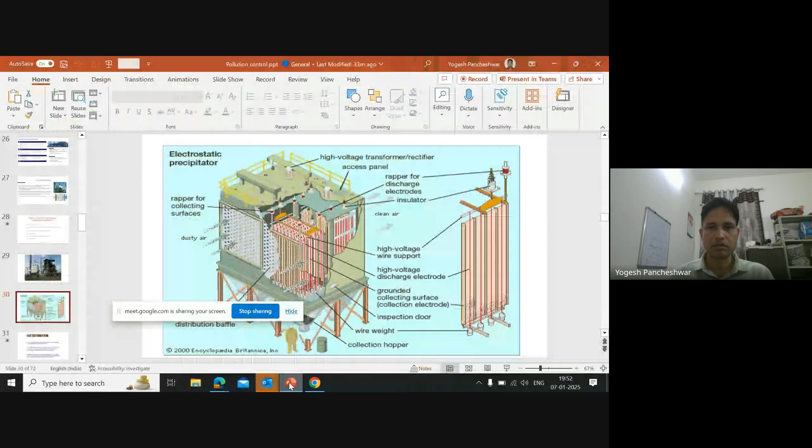Is the presentation visible or something? No. Entire screen share, okay, then I have to select the share. Entire screen, then share, I have to select something. Yes, sir. After that you have to click on the screen that you want to share. Yeah, and after that click on share. Okay just wait, just share your screen, then my screen. Not coming. Share, okay. Is it coming right now? Yes, it is coming sir. Now it is coming. Okay, yes, thanks.

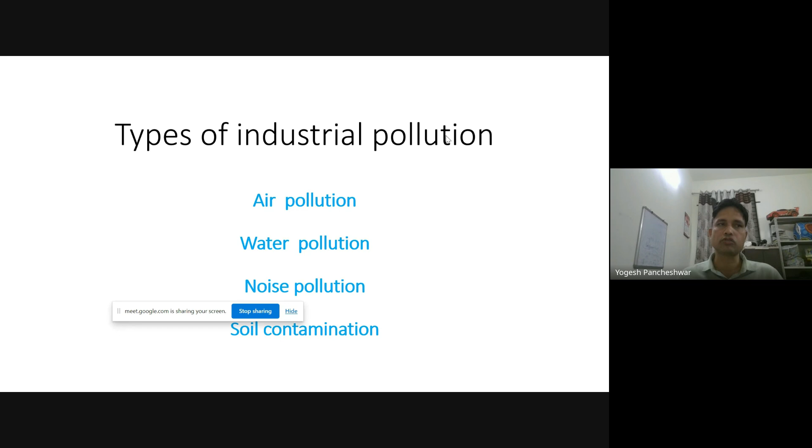As you know, in most industries, the most important thing is safety of the equipment and safety of the human. Before starting any project, we invest so much in how people will remain safe during the whole life cycle of the industry. The second most important thing we focus on before production is the pollution control equipment. This is a legal requirement as well as a requirement for the longevity of the plant.

So industrial air pollution is basically this: the industrial process generates various particulates and harmful gases called pollutants. In industries we generate fly ash, coal dust, iron ore, and harmful gases like SOx, NOx, and volatile organics. We cannot release these to the atmosphere beyond certain limits, and we need to control particulates and harmful gases to the desired level, which varies from country to country.

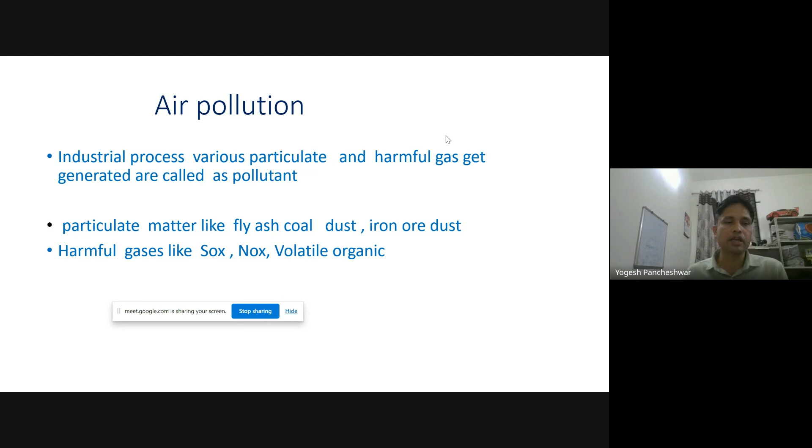As you already know, some industries have already been closed down due to high pollution. For example, the Vedanta Tuticorin plant was closed for almost 5 years for not meeting environment norms. And recently we have also been fined by the Netherlands, we have one plant in Tata Corus also, where we were fined 250 crores for not meeting industrial norms.

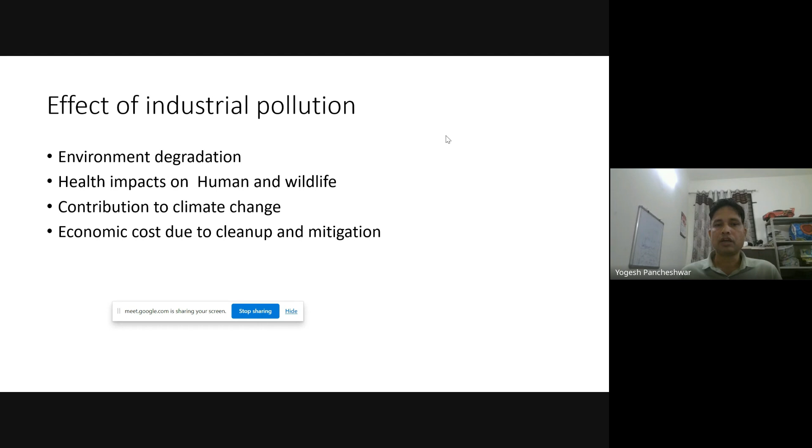Already I have explained what things can happen that affect health, and breathing problems we can face because of that. People who are working in close vicinity with the dust and air pollution, it also affects the plant safety.

If more emissions are there, then it will affect the visibility and some accidents can happen. Besides that, it also reduces the life of the equipment. If the pollution control equipment is not working properly, the life of these equipments will be reduced, and definitely it will also reduce the efficiency.

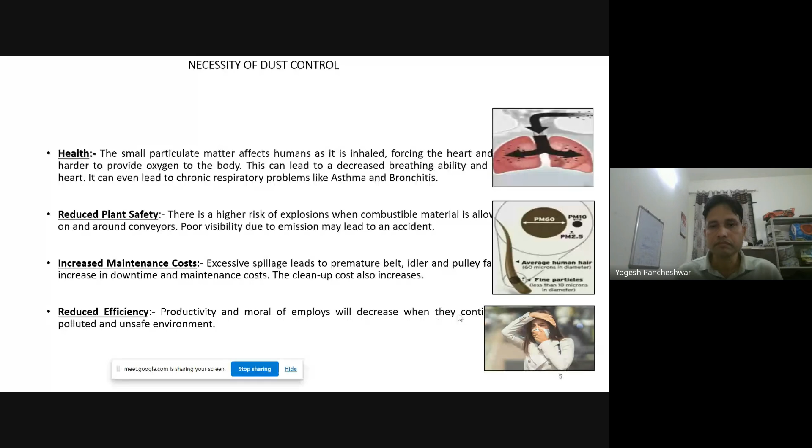So what are the benefits of the pollution control systems? Definitely environment sustainability. If we wanted to live in the same atmosphere, if we wanted to give the same thing to the next generation, this is the main focus right now - improved public health and compliance with regulations, meaning legal compliance.

It is a must right now to meet our environment norms. For that legal compliance, most of the chimneys are being monitored by government agencies. In India, it's 50 mg per normal metric cube of dust we can release to the atmosphere. If it goes higher, our government team is continuously monitoring us through an online system. If it goes to the peaks, we need to give an explanation and justification to the government bodies. Being Tata Steel, we are also very stringent on that.

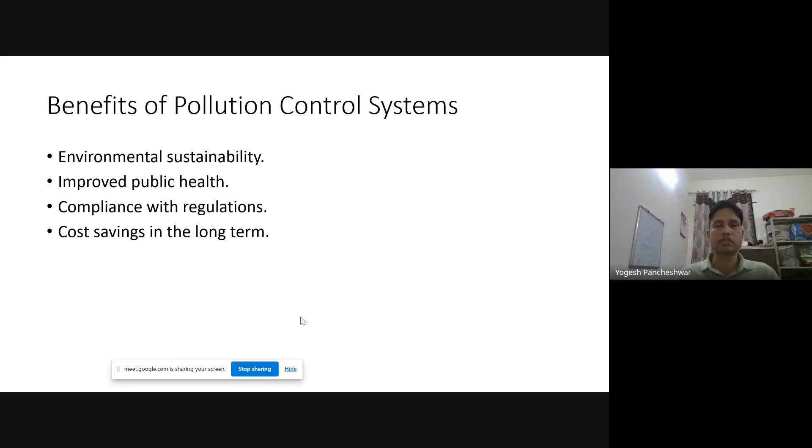So for dust control, there are different methods. The way that material is producing, like coal and iron ore, the process and operation of the generation - in which process it is generating, whether in the sinter plant, RMHs, blast furnaces, coke oven, or LD shops.

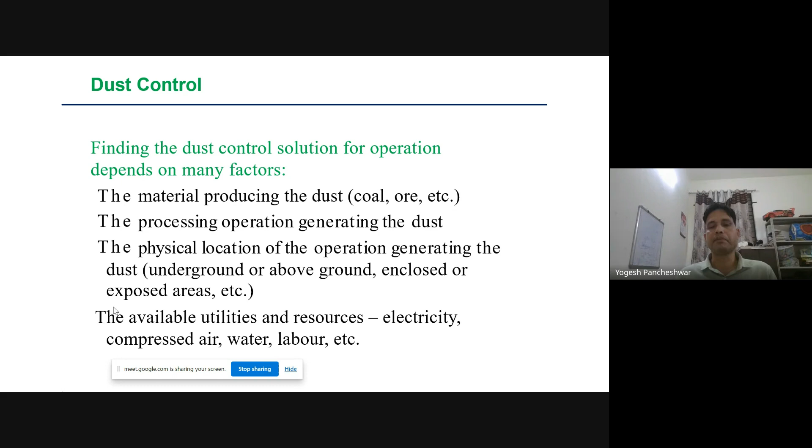According to that process of generation, we are putting our equipment, selecting the equipment also - the physical location and operation of that. And then other things are what utilities are available for the separation of the dust, whether proper electricity, compressed air, water, or labor are also available for such things. So according to that, we are putting the pollution control equipment.

Basically, air is considered to be polluted when it contains a certain substance in a concentration which is high enough, for a duration long enough, to cause harmful or undesirable effects on the human body. This includes adverse impact on human health, property, and atmosphere. Sometimes it is natural, and sometimes it is man-made.

So for pollution control, we have air pollution control equipment. Basically some equipment are cyclones, scrubbers, electrostatic precipitators, bag filters, and dust suppression systems, which I am going to explain in the next few slides.

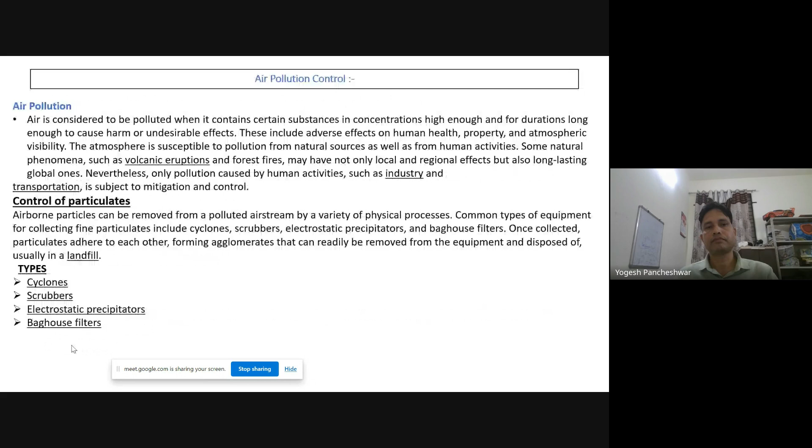Air pollution control technologies - I have already told there are four or five types of air pollution control equipment, and these are also divided into constant efficiency type and constant emission type. Constant efficiency type means if the dust generation is higher, meaning inlet is more, then the outlet is definitely more. There is no point, so we need to control some processes.

But like bag filters is also constant efficiency type. Yeah, bag filter is a constant emission type. If the dust generation is even more, meaning inlet is even more, but outlet will remain as per the design parameters.

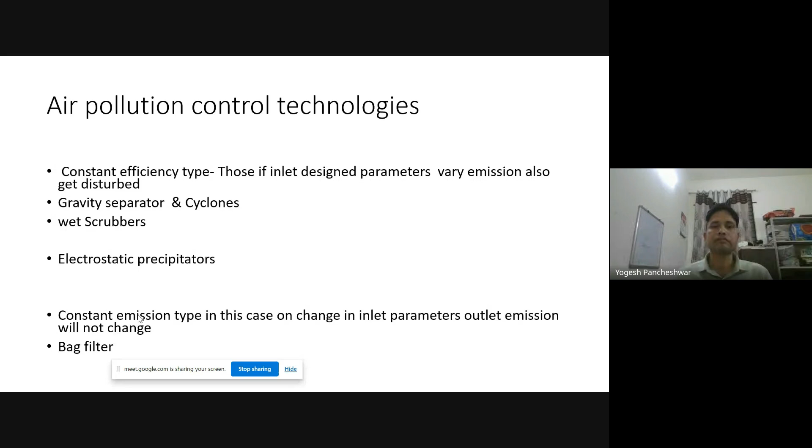So let's first read about cyclones. Out of the 4 or 5 equipments in air pollution by which we are controlling dust, the first is cyclone. In cyclones, generally high velocity dust enters this position, and then my cursor is visible - yes sir, it's visible, sorry, yeah thanks.

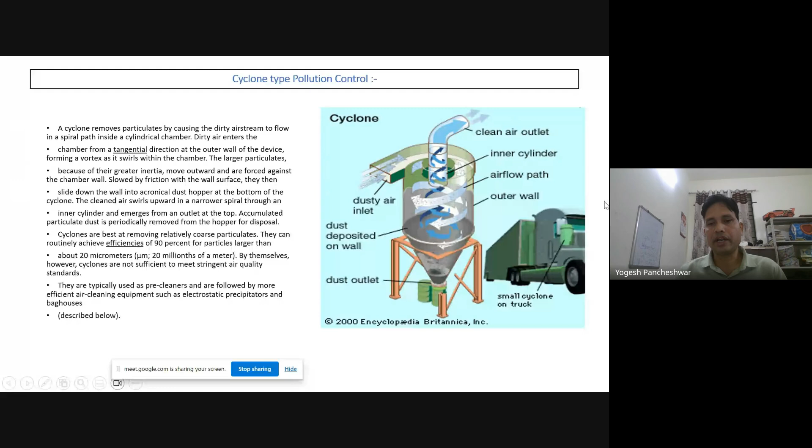So then that dust is going in this direction at high velocity. Then it impacts on the body of the silo, and due to the higher energy, the higher particles get impacted on that body and fall down. And the lower particles, meaning micron size, come out after the swirl motion, come down, and go outside.

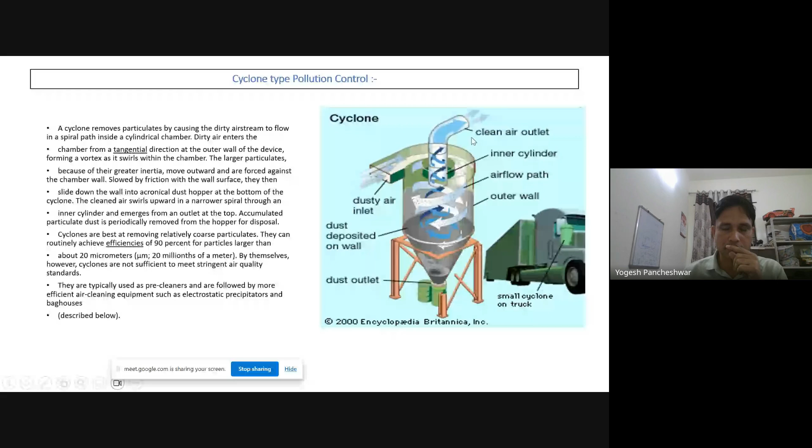The main advantage of the cyclone is that it is very cost effective with no moving parts, and heavier particles can be easily separated out. The disadvantage is it is not designed for microfines, meaning particle sizes less than 1 or 2 microns, because that would be released into the atmosphere.

Generally the cyclone is used as a primary cleaning system, and after that the dust laden gases generated have to be passed through the bag filters and ESPs for secondary cleaning. Then we can release the dust to the atmosphere, which as per norm should be less than 50 mg per normal metric cube.

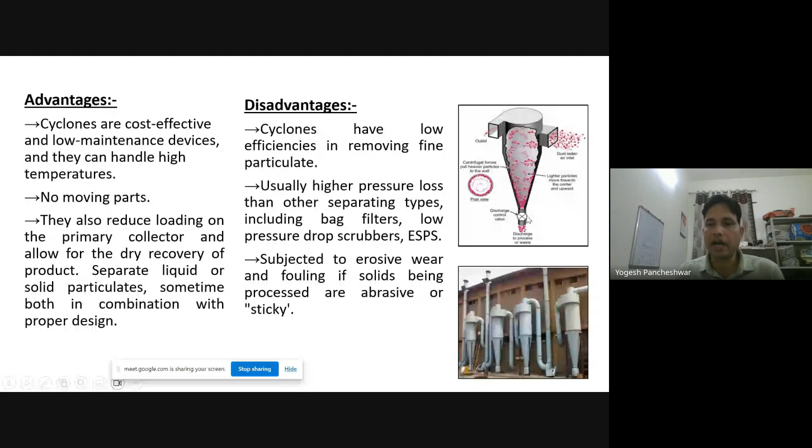It should be less than that. So generally that is the cyclone, and the dust generated from the cyclone we remove from the RAB, and again we recycle it to our systems.

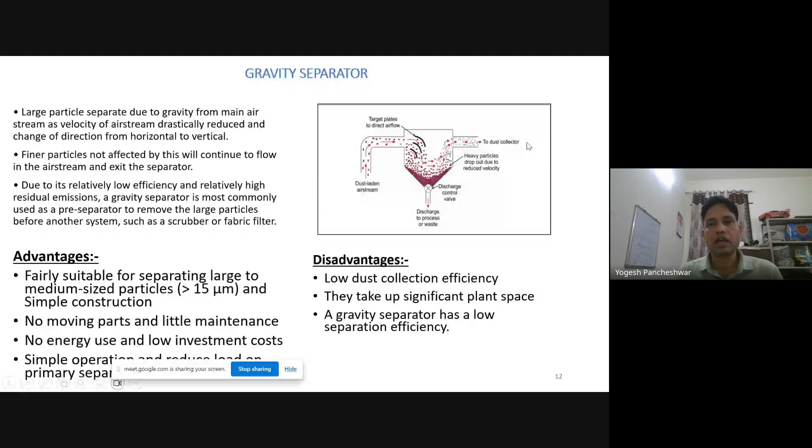Then we also have a gravity separator, in which dust comes out with high velocity. We suddenly reduce the pressure, converting it into low velocity. With the pressure reduction, the heavier particles fall down, and the lower particles go to the bag filter and ESPs.

Then the third system is scrubbers. These are generally used for sulfur dioxide and nitrogen dioxide removal, meaning the removal of gaseous impurities. These are generally utilized in coke ovens, where gas is put from the top or comes from the bottom, and in some places water is sprayed from the top.

The gaseous impurities, like ammonia, have very good affinity with water, so it comes down along with the water, and the dust impurities also come down. Then we send it for recycling to other cleaning systems where we settle it down, and the dust goes to the biological oxidation plant and the COD plant, the chemical oxidation plant, where we remove other chemicals, and then the water is recycled again.

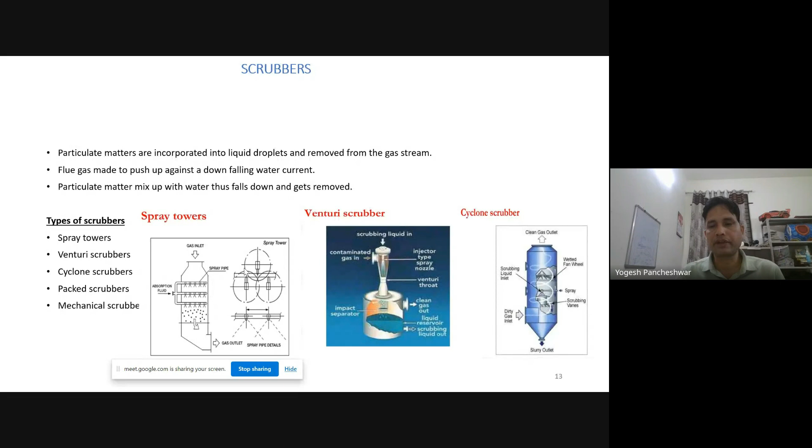Then we have Venturi scrubbers with a similar function, and cyclone scrubbers. In these, as I already told, gas comes from the top or bottom, and water is sprayed in the form of mist, with packed wooden pieces as the packing material. The gas has to pass through this, and then the heavier particles as well as gas impurities go down, and the rest of the flow is diverted toward the chimney.

Some advantages: hot gases can be easily cooled. Sometimes hot gases are generated in the system, which have to be cooled down before being utilized elsewhere or sent to another source for utilization. Also, corrosive gases can be recovered and neutralized.

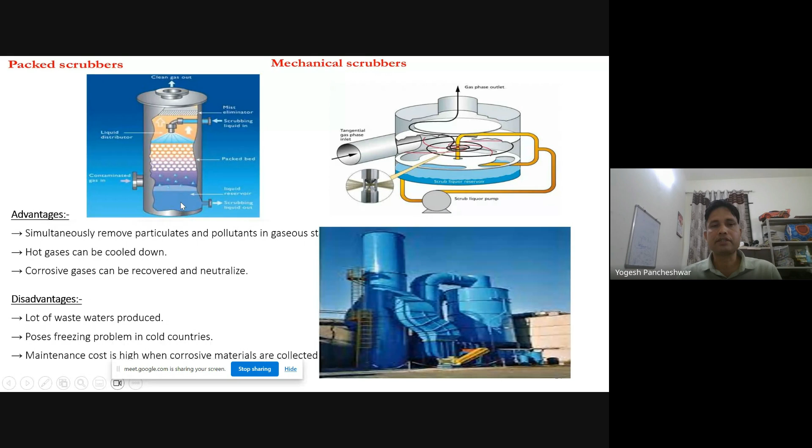Disadvantages of this process: a lot of wastewater is produced, and it poses a freezing problem in cold countries. Maintenance cost is high when corrosion affects the material, since these systems are generally made up of mesh plates or similar, so corrosion is very fast, and we need to continuously remove and replace these tanks.

So what are the advantages of scrubbers? They are useful for collection of particulates and gases, and general collection efficiency is 80 to 95%. They require quite a high amount of water, and it can be a problem if dust gets clogged in the packings, since it then has to be reopened and cleaned, so packing and clogging issues are always on the higher side.

They cannot be used where the collected material is required for recycling, meaning we are collecting it, but recycling is in wet form, so we need to dry it out again.

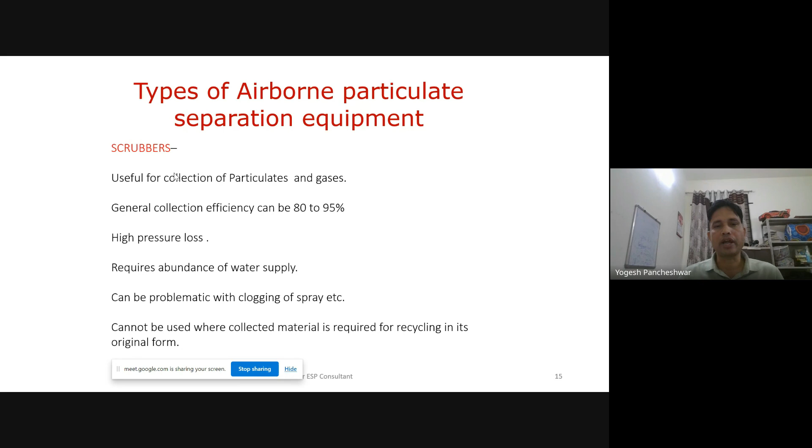Let me explain what happens in bag filters. The dust laden gases enter the system. We have bags like this, and as the gas enters, the dust gets stuck to the bag filters. An ID fan is connected, the dust laden gases enter, it gets filtered, and the filtered gas goes to the chimney. In the next cycle, compressed air at high pressure, around 4 to 5 kgs, pulses on the bag filter, and the dust falls and is removed, then recycled into the system.

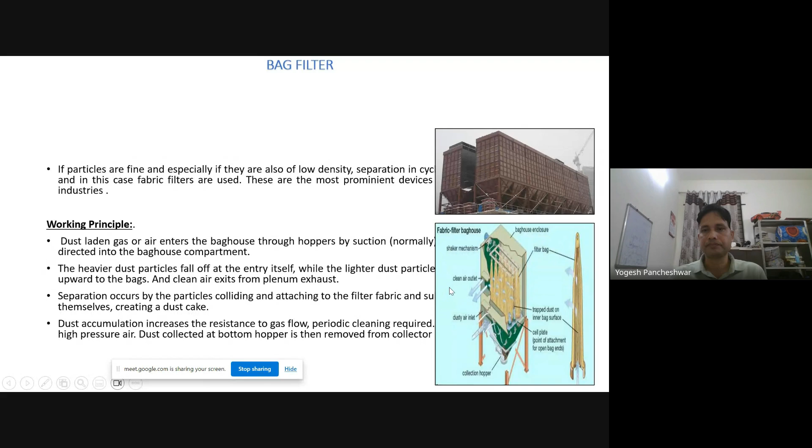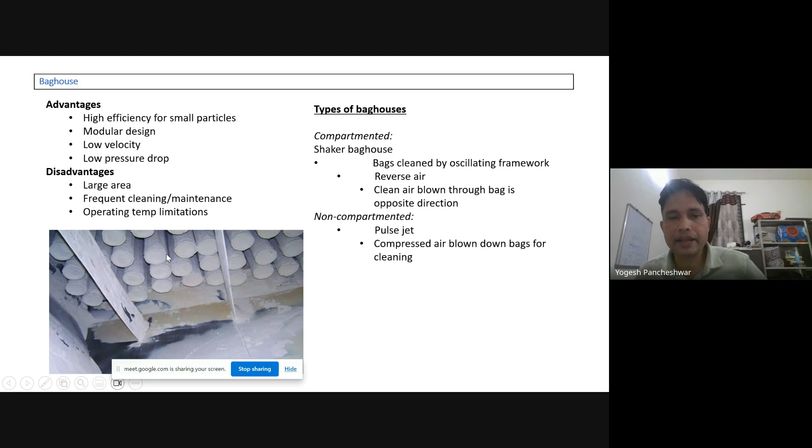This is basically a bag filter, and this picture has been taken from the plant. The bags are like this, cylindrical in shape, having a cage inside, like a skeleton. The advantage of this is high efficiency, and the disadvantage is that a large area is required, with high frequency of cleaning and maintenance on the higher side.

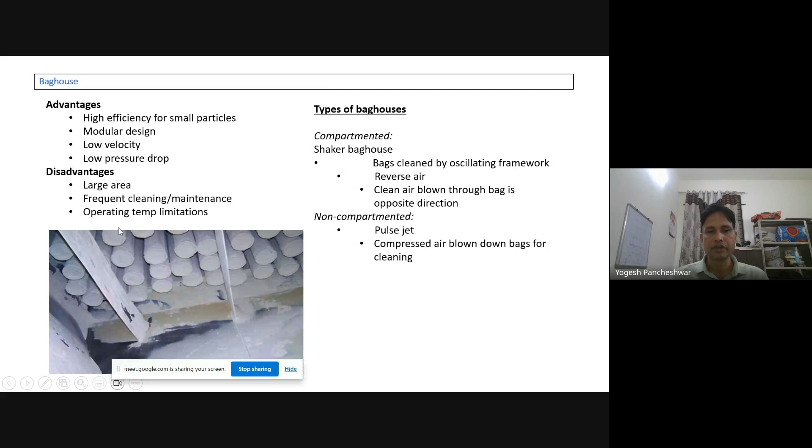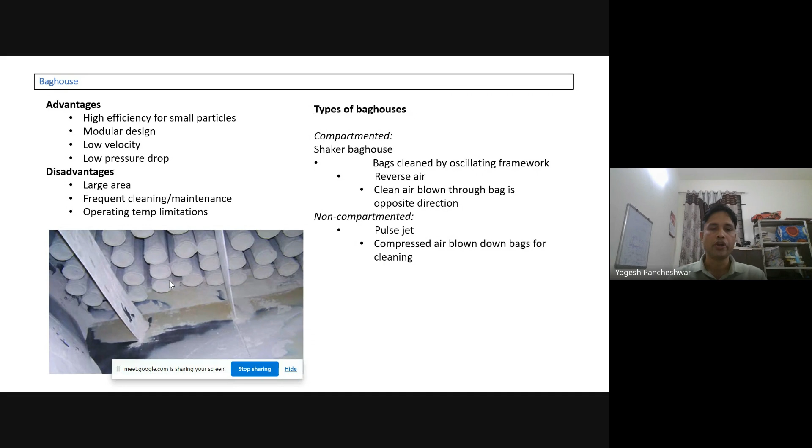Regarding operating temperature, we cannot operate it beyond certain limits since it is generally made up of fabrics having a temperature withstand of maybe 100 degrees Celsius for some, and maximum 200 to 250 degrees Celsius for others. If the gas impurities have a temperature more than 200 degrees Celsius, then we are not suggesting to use it for that gas.

So as already explained, the dust laden air enters from this side, gets filtered, and the clean air gets out from the system. Besides that, there is a purging system, where it purges from these bags, and the dust that is stuck in the bags falls down.

The basic parameter we monitor in the bag filter is the delta P. If the dust remains stuck to the bags and purging is not happening, then in the next cycle the efficiency of dust collection will be reduced, and it won't be able to suck the dust from the conveying points. So we monitor the DP, always maintaining it between 100 mm water column to 200 mm water column. If the DP is increasing, it means the cleaning process is not working properly, and if the DP is decreasing, it means the bags are torn out and need replacement.

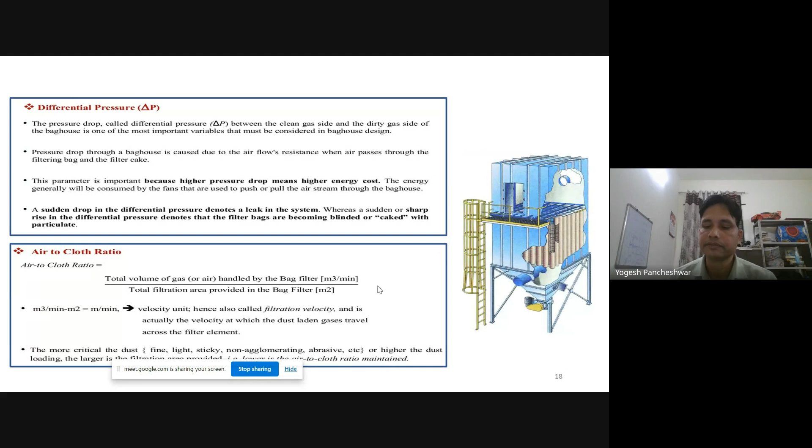This is the same thing I've already explained. Generally, typical applications of bag filters are in power plants, fertilizer, steel mills, and food processing. It's widely used in every industry for reduction in pollution.

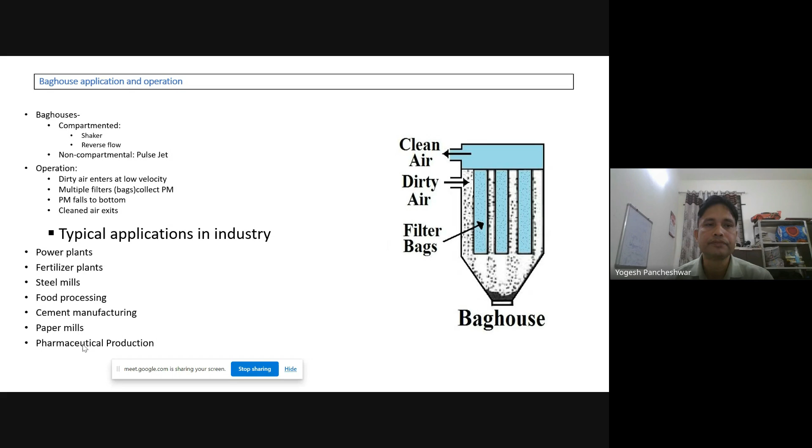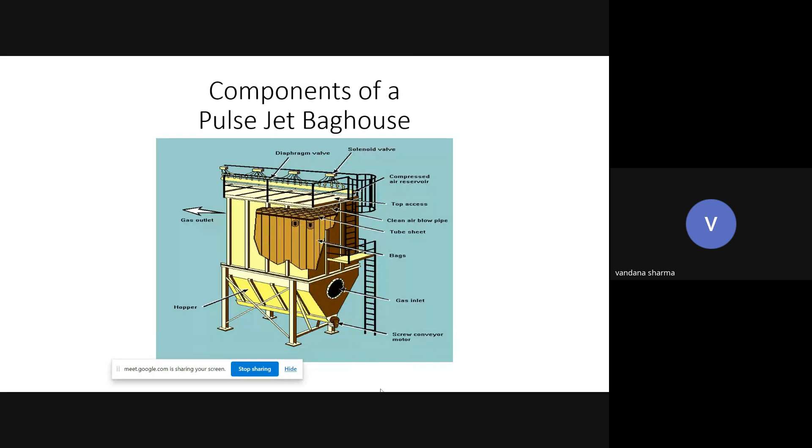We'll continue. There is a gas inlet box. This is the bags, these are the tubes, and this is the top access where workers or laborers go for changing the bags. We remove them from the top, and this is the solenoid valve -- the purging happens with the solenoid valve.

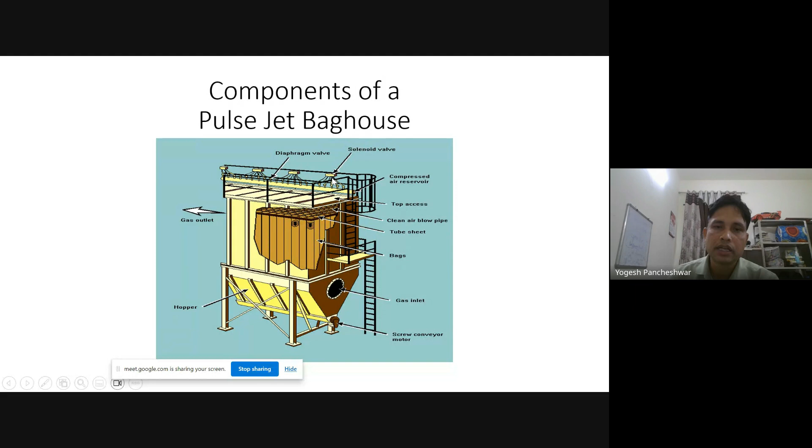Basically, it is useful for collection of dry particulates, and we are not using it for wet systems, because if the bags get wet, we are not able to use them with the same efficiency, so water is very dangerous for bag filter systems. Its general collection efficiency is more than 99.99% for dry systems. It has very high pressure loss, resulting in recurring costs since we continuously need to put money into power as well as purchasing replacement bags, and it requires very high maintenance.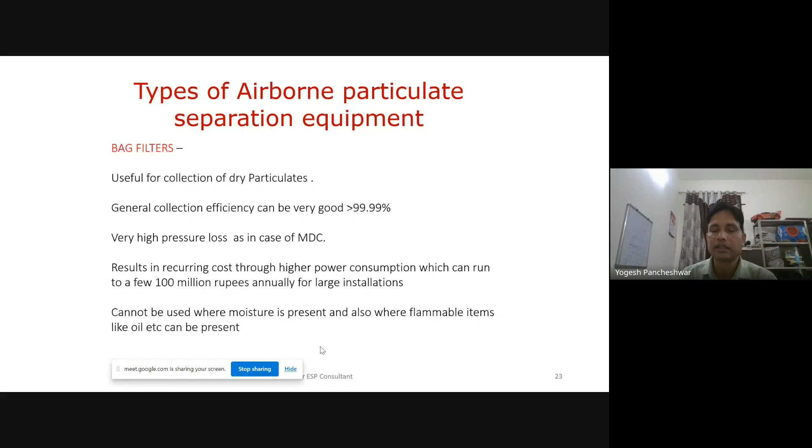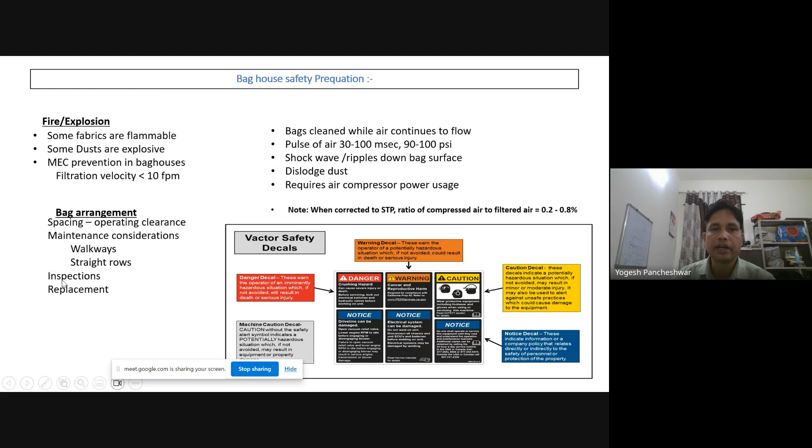Bag filters cannot be used where moisture is present, and cannot be used for flammable items, because if something flammable goes inside the baghouse, it easily catches fire and has a disastrous effect in the atmosphere. Already in some bag filters we have faced the problem of high temperature causing the bags to catch fire, so it is not recommended for highly flammable substances.

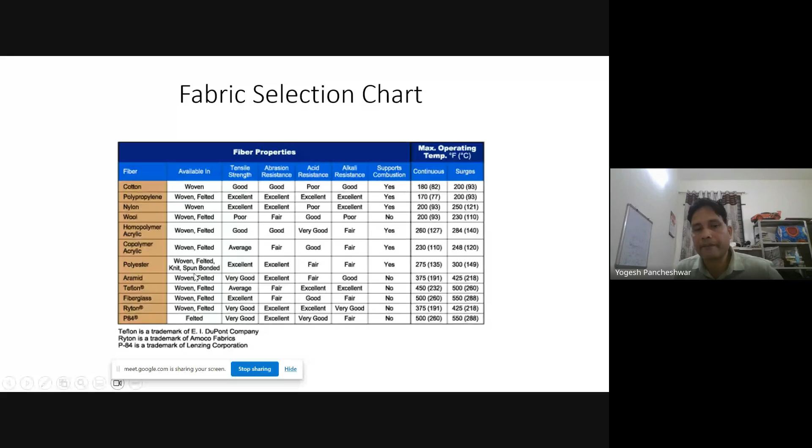Generally bags are made up of cotton, polypropylene, nylon, wools, and each is having some advantage as well as disadvantages, as well as a temperature range. It is also mentioned up to what temperature each can handle. Something like fiberglass has a 260-degree range, but those bags are very costly. So it is recommended to utilize bags that are also cost effective.

Some of the periodic maintenance we do in the bag filters is monitoring to maintain its efficiency. We monitor the differential pressure, which is the pressure difference between the clean air side and the dust-laden air side. If the DP is on the higher side, it means the cleaning process is not happening properly. If the DP is on the lower side, it means the bags have got worn out and have to be replaced. So we need to observe the exhaust stack.

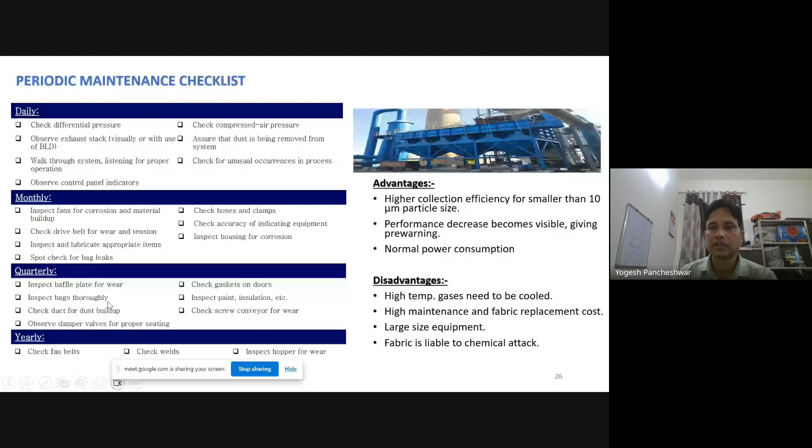The fourth type, which is very important for high temperature, is the electrostatic precipitator, generally called ESP. The electrostatic precipitator is a method of dust collection. In this, what is happening is, just wait.

So in this, what is happening is there are collecting plates, like this plate is there, and there is an emitting electrode in between. In that ESP, the high voltage transformer is on the top. Then we have a rapping system for cleaning of the collecting plates and the emitting electrodes. So we have collecting plates and emitting electrodes.

In the collecting plate, what is happening is that dust-laden air enters through this distributor, and the dust-laden air is distributed properly in the system. We make this system negative, meaning a negative field is generated inside the system, so the whole dust gets a negative charge, and the collecting plate has a positive charge. So the negative charge dust, once entering into the system, gets collected towards the collecting plate.

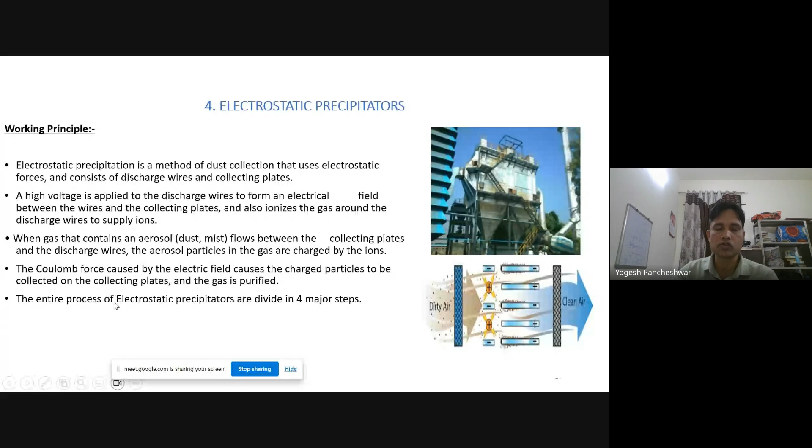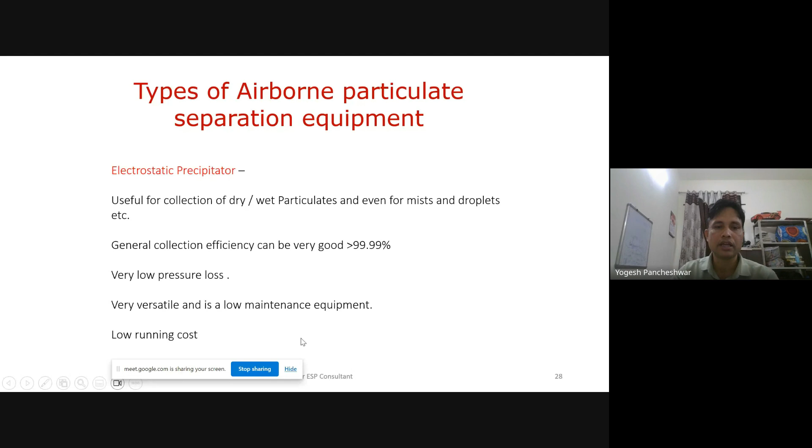Types of airborne particulate separation equipment are useful for the collection of both dry and wet particles. General collection efficiency is more than 99.99%, with very low pressure loss, versatile running, and low running cost. Maintenance cost is also on the lower side.

Installation cost of ESP is very high. What is affecting the performance of the ESP is a good distribution system. Once the gas is entering, we have holes in this distribution system which allow the gases to spread all around the ESPs.

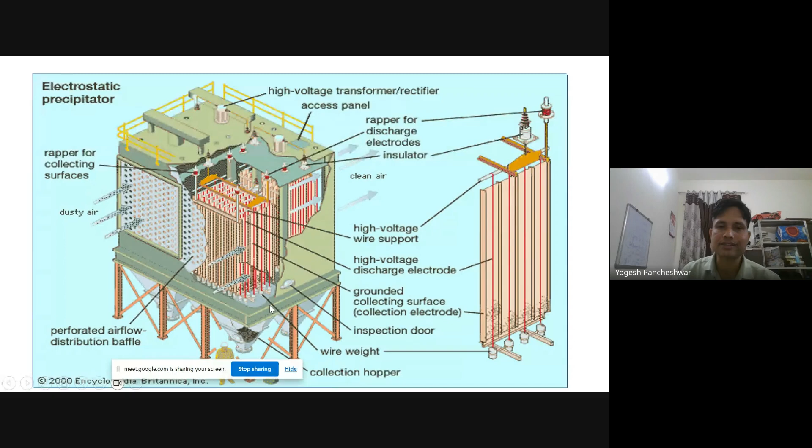Operation factors affecting the performance of the ESPs include gas volume, gas temperature, dust entering the ESPs, effectiveness of rapping, and the hopper evacuation system, meaning the dust collected inside the ESPs has to be cleaned at regular intervals. The alignment of the electrodes, meaning emitting electrode and collecting electrode alignment, is also very important during these processes.

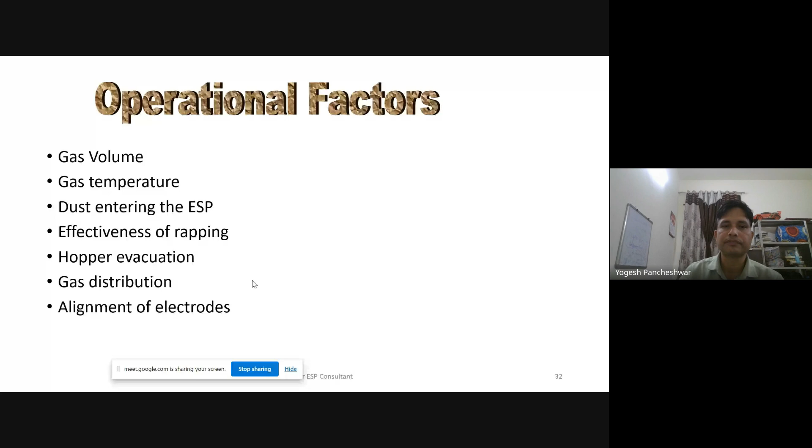If the gas volume increases mainly due to malfunction of the operation, it definitely affects the performance. There should not be any leakage, meaning the gas should be taken only from the process. If false air enters inside the system, it definitely affects the performance of the ESPs.

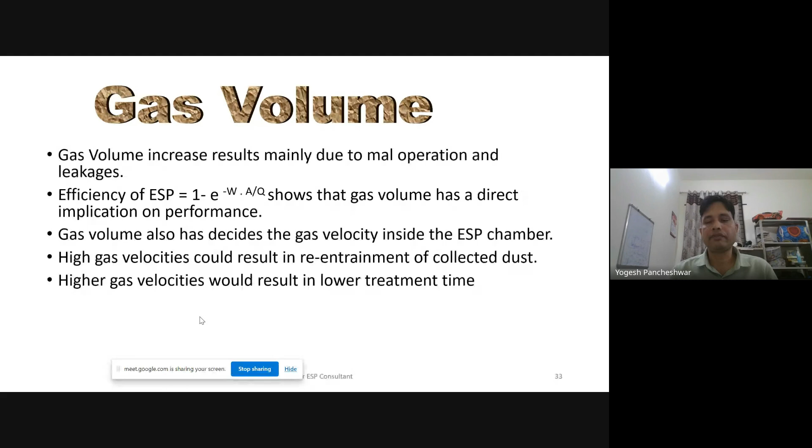Gas temperature results mainly from malfunctioning of the operation, leakage, and poor maintenance. If the gas temperature is increasing, it results mainly due to malfunction of the operation. If the temperature inside goes high, maybe 200, 250, or 300 degrees, it also deteriorates and affects the performance of the plate.

In some cases in our industries, we have seen that the collecting plate gets deformed because of that high temperature, and then the system performance is affected. So that temperature we need to maintain.

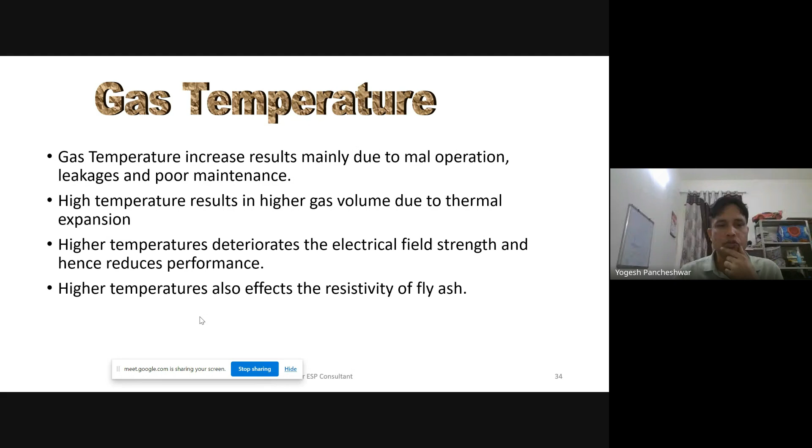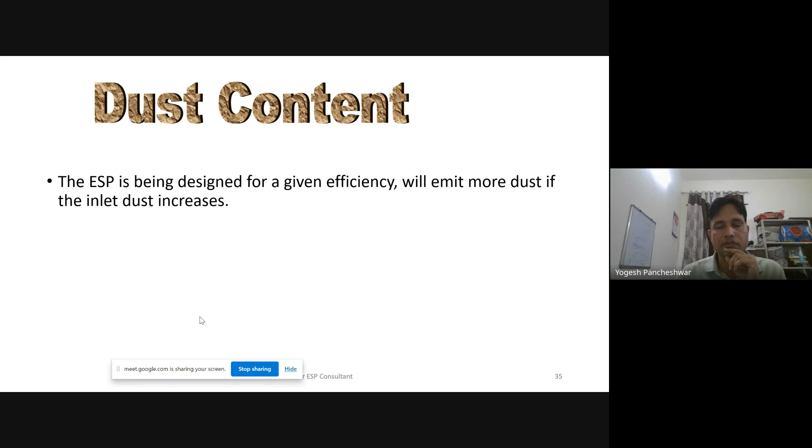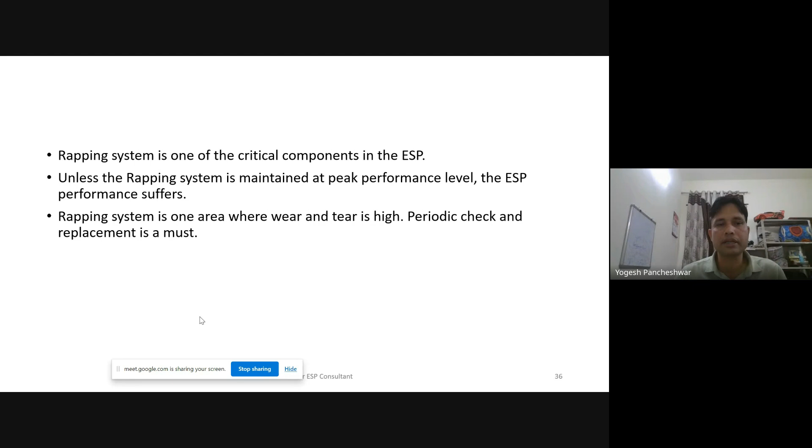The ESP is being designed for a given efficiency, and the rapping system is one of the critical components of the ESP. At regular intervals, the rapper should hit the collecting plate so that the dust which got stuck to the collecting plate falls down.

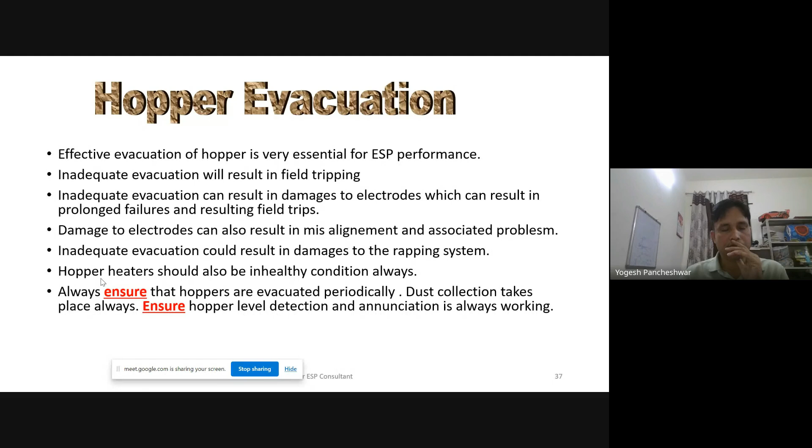The hopper evacuation system should be very strong. The dust generated in the process should be evacuated at regular intervals; otherwise it will touch the collecting plates and emitting electrode, and a short circuit will happen inside the ESPs. There is also a hopper heater inside the ESP hoppers, so that the dust being collected should not get condensation and should not reduce its temperature. Otherwise, it will absorb moisture and jam the whole evacuation system.

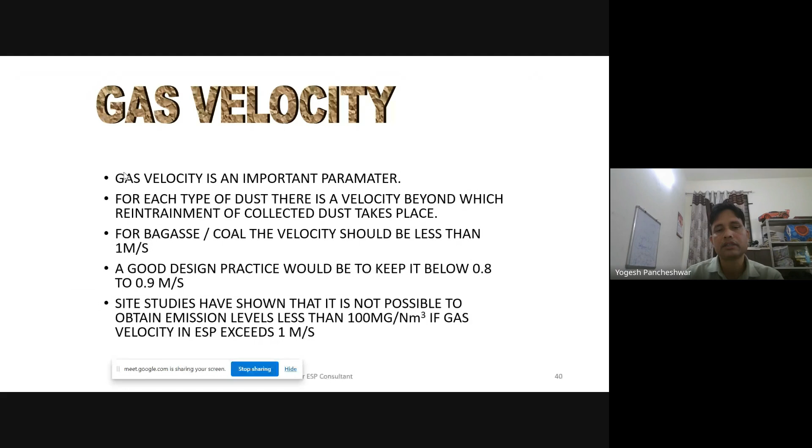Gas velocity is an important parameter. If the velocity is on the higher side, our collecting system will not be able to collect the dust that is passing through. So we need to maintain the gas velocity as per the design. Generally the velocity should be less than 1 meter per second, and good practice would be to keep the speed of the gas generation between 0.8 to 0.9, which we control through the ID fan connected to the ESPs.

Factors affecting the performance of the ESPs include the properties of the dust, the gas properties, energization effectiveness meaning the performance of the transformer, and the effectiveness of the dust removal systems.

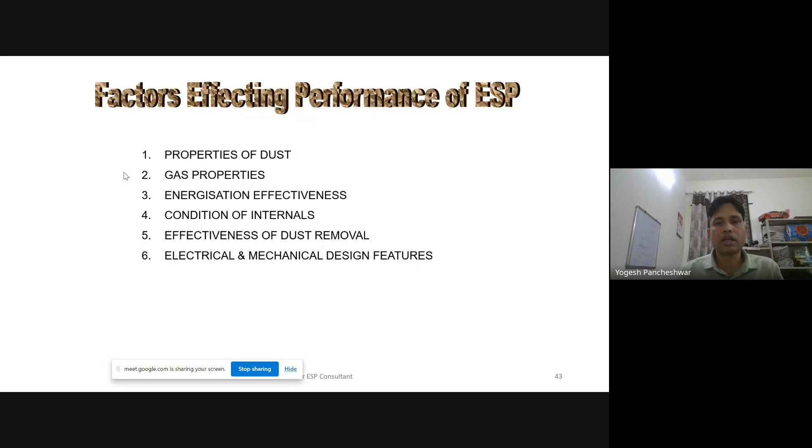Properties of the dust are also important. The properties of the dust collected in the precipitator have a very large impact on its performance. The fly ash generated generally in power plants and fuels, and cement dust from the cement cooler, each have different precipitation characteristics.

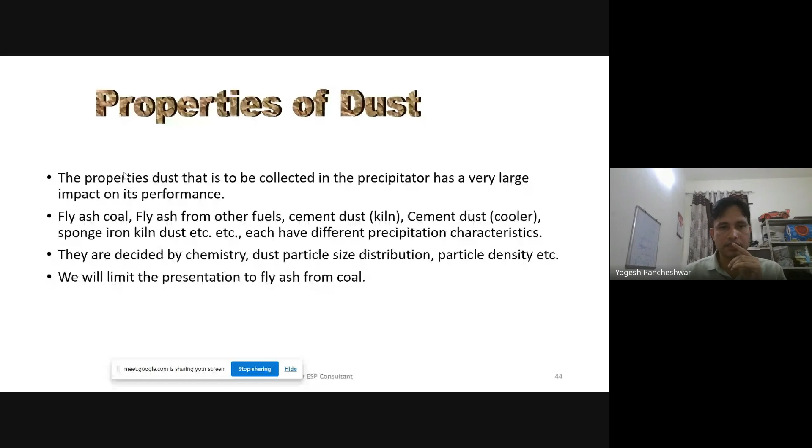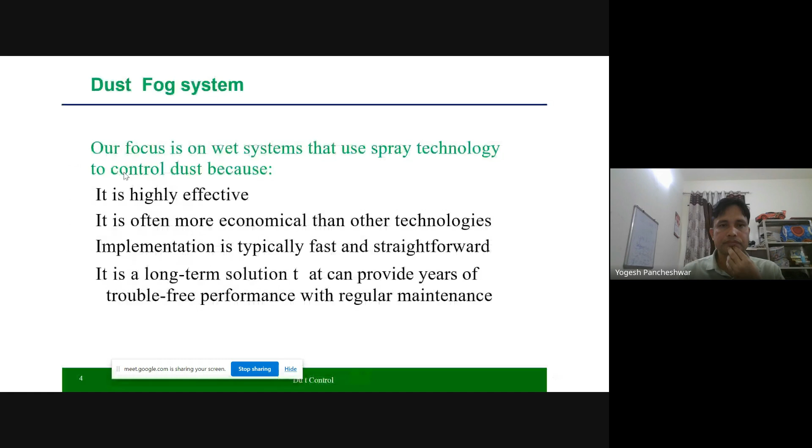So dust variable, then different types, and the last one is we have dust suppression systems. Generally, suppression systems, what we are doing depends upon the type of micron size which we are generating in the systems, like limestone, fly ash, coal dust and cement dust.

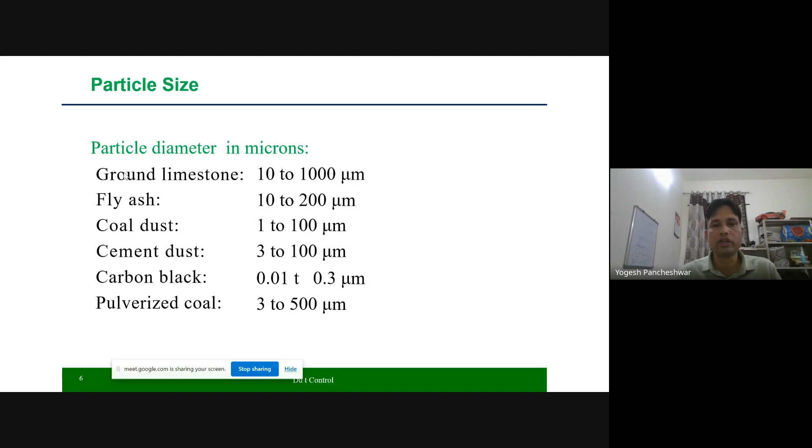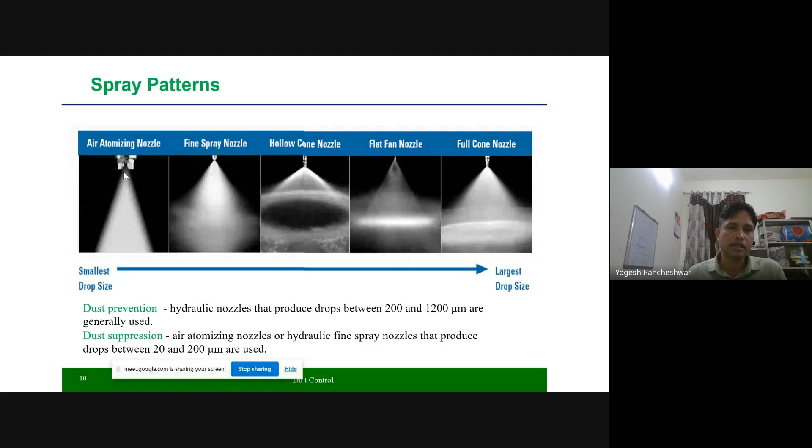What we are doing is making droplets of water, atomizing the water with the help of compressed air, and spraying it into the dust laden systems, or in the conveyor lines where material is being discharged from one system to another. There we are putting the dust suppression system, and once we are spraying water on the dust, the water suppresses the dust in this fashion.

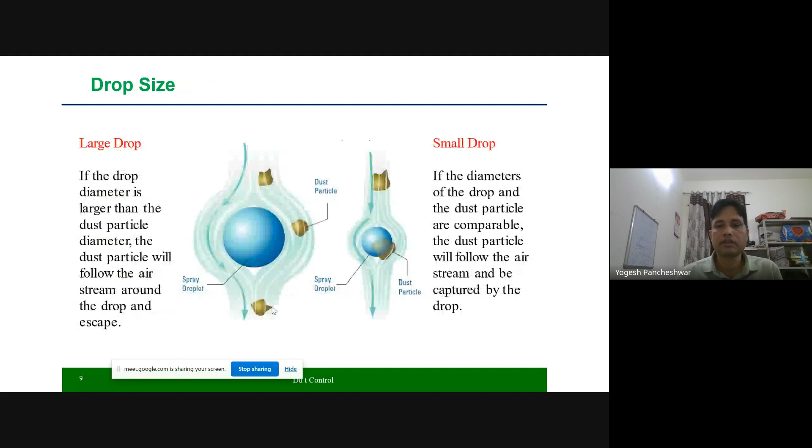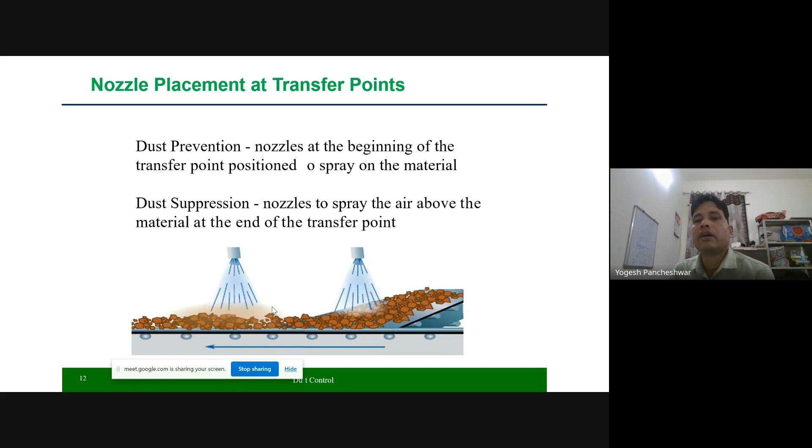So this is one of our conveyors and the transfer points, not just at the beginning transfer points, and we are spraying water over this, and this helps in suppression of the dust.

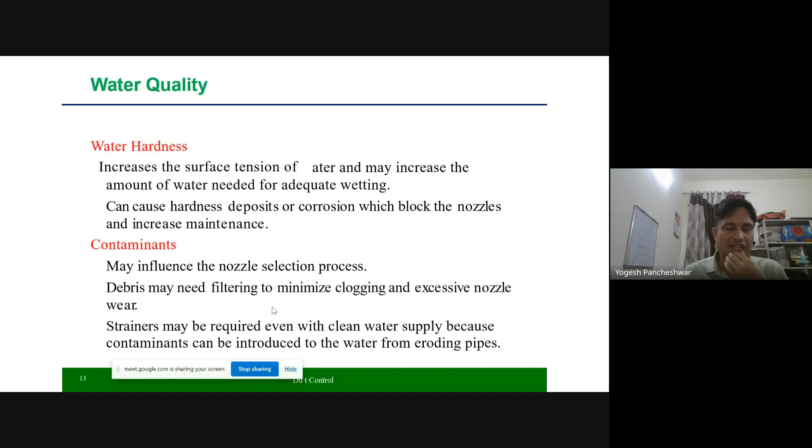For this, we also need to maintain the system healthiness, we need to maintain the water hardness, and it should be as per the design parameters. And we also have to maintain the compressed air systems properly for that.

Sometimes we also use some chemical binders in the dust separation, putting it inside the hoppers or something, so that the material which we are storing is not sticking, and during transportation they are also not producing much dust. So we are adding some chemicals in that also before transportation.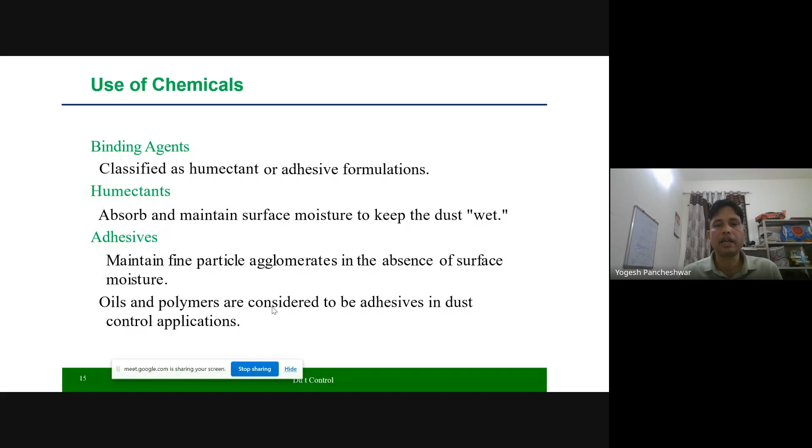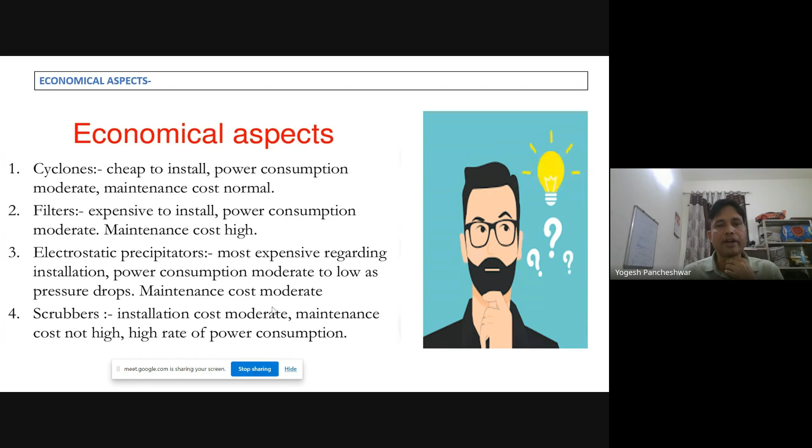We are also analyzing in our plant why CO2 emissions are higher in some of the processes, and we are continuously improving that system. We are continuously working on how our systems will work more effectively.

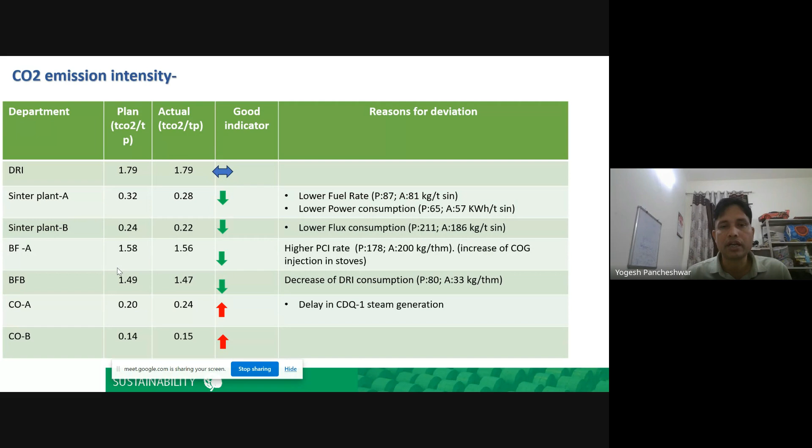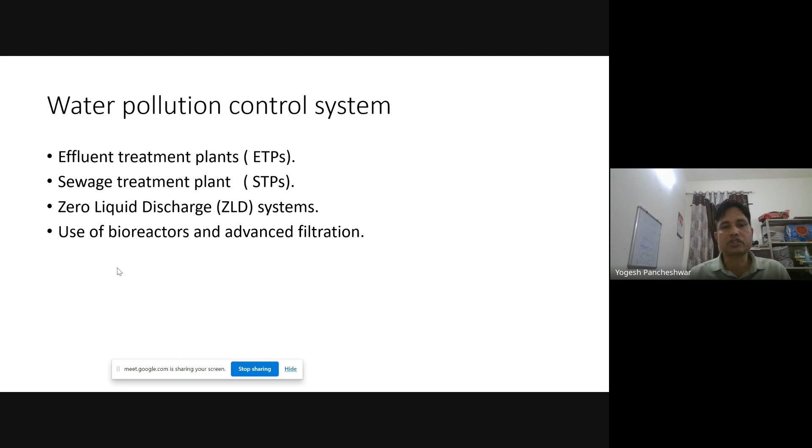Then we have water pollution control systems which we are not touching much. The effluent treatment plant is there. Then our COD and BOD are there. Then sewage treatment plants are there. Then zero liquid discharge systems are there. Use of bioreactor and advanced filtration systems are there for the water pollution control systems.

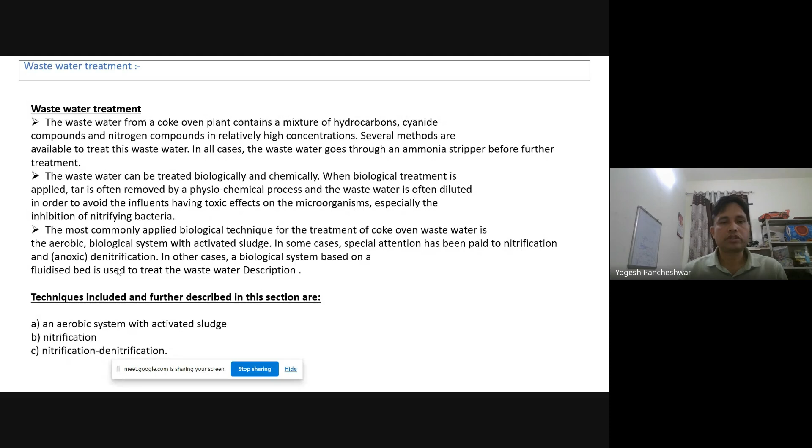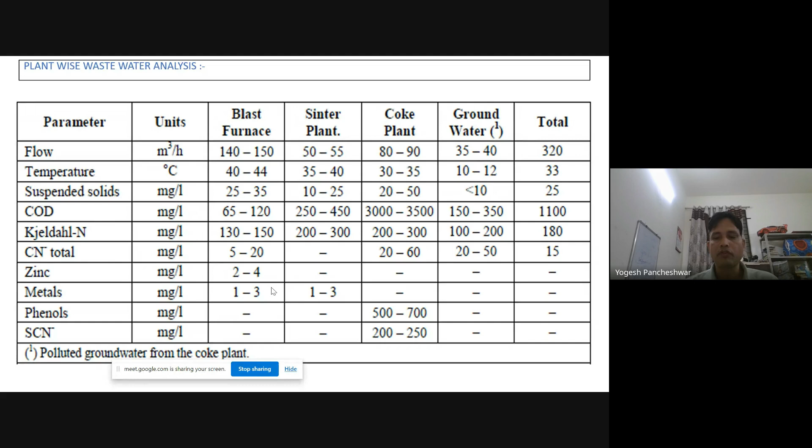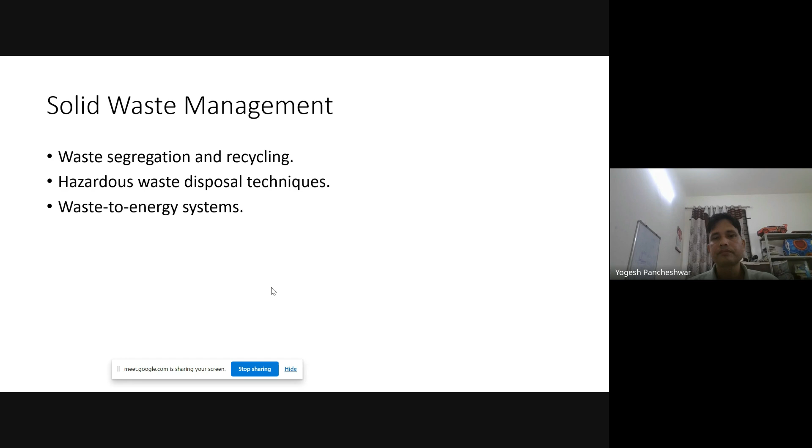Another pollution we address is noise pollution in the industries. We are using acoustic enclosures and silencers in different machines, and continuously monitoring the noise with dB meters. It should be less than 85 dB, and whatever goes to the plant surrounding area should not cross 85 dB. We are also putting sound arrestor systems all around our boundaries.

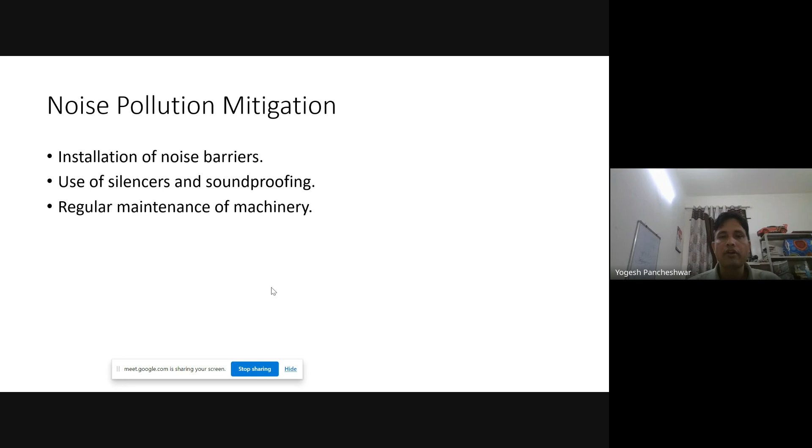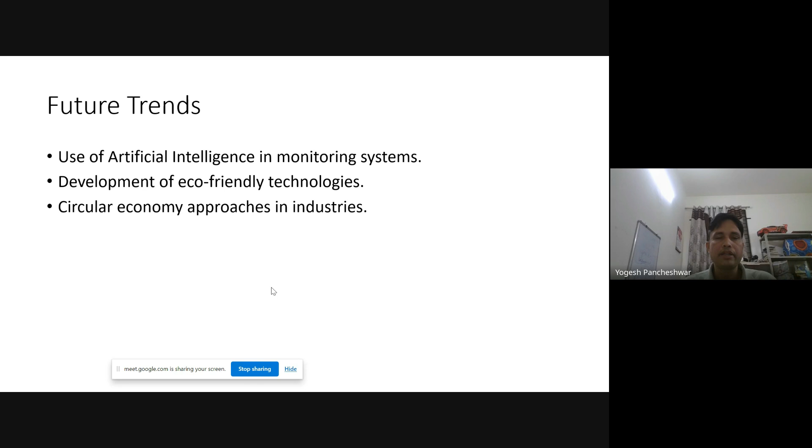As a future trend, we are also using intelligent monitoring systems where our systems are connected to one central unit, and all the pollution control equipment is monitored by our environment department. Besides that, we are developing eco-friendly technologies, and our R&D departments are continuously working on how to reduce pollution and promote circular economy. These are things we are doing continuously to reduce pollution for sustainability, and we are working in that direction also.